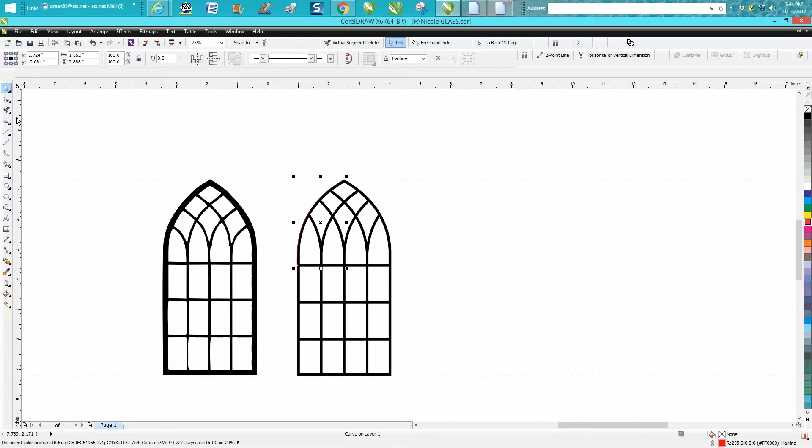I got my nudge factor set pretty high. I'm going to move my arch over, Control D to make a duplicate of it, then hold down the Control button and make an exact mirror of it.

Now I've put in some indexing lines at the top and the bottom of what we need. So now I'm going to take my 2-point line, grab that node, hit the Control button, and move straight down past my line. I think I actually missed the node on that one.

Then I'm going to take another 2-point line and go a little bit past my line. Sometimes Corel does that. So now you've got your shape.

Take your Smart Fill tool, fill it in, move that out of the way, left click, right click, and basically you have a perfectly welded group. Let's move it back over.

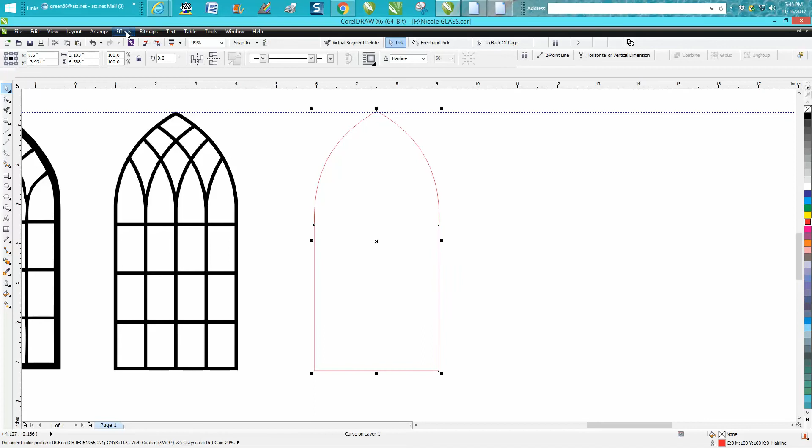Now go up to Effects, Contour. We're going to contour to the inside 0.09. There we have our shape.

Now I could break that apart, but to me it's a lot easier to take your Smart Fill tool and just get that shape. We can erase this one, move it back over, move our Smart Fill away, left click, right click. So we're pretty much got the shape.

Now we need to bring down some indexing lines. I'm going to put it at the top, or right about the middle of that line, and about the middle of - I'll tell you what, we're going to go to the bottom on both of them.

Now, since we're at 0.09, I'm going to draw a line that's 0.09. Doesn't matter how long it is.

Now we're going to move this down to where it's right there. We're going to make another one and move it down to the very bottom. For the video, like I said earlier, I'm not going to try to get everything dead on, but it needs to be pretty close.

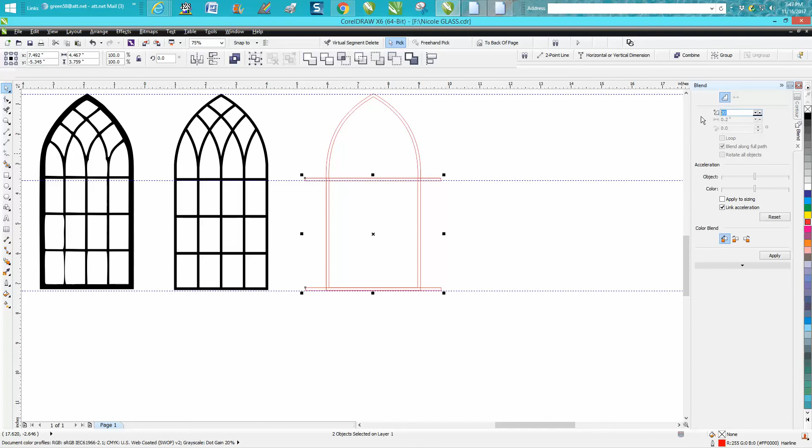You've got that one selected, select the other one, go up to Effects, Blend. We're going to blend - we need 2. So now we've got those.

Now I would go ahead and cut off - this is one thing nice about the virtual segment delete key. If you'll just get in the area... oh, see what's happening? We have to break the blend apart for it to delete those lines.

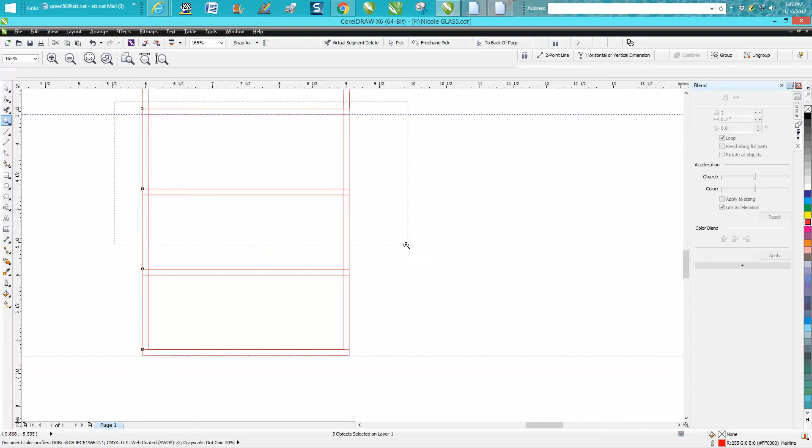Now some people are going to say, well, why don't you use the weld tool? The weld tool in this particular case I don't think will work, but we're going to go ahead and delete all these lines we do not need.

There might be a way to intersect or something, and also with the virtual segment delete key, you don't actually have to be on it. Sometimes you can do a double line right there.

We got one more set. This is going to be a long video - I might break it up into 2 just so it won't be so long.

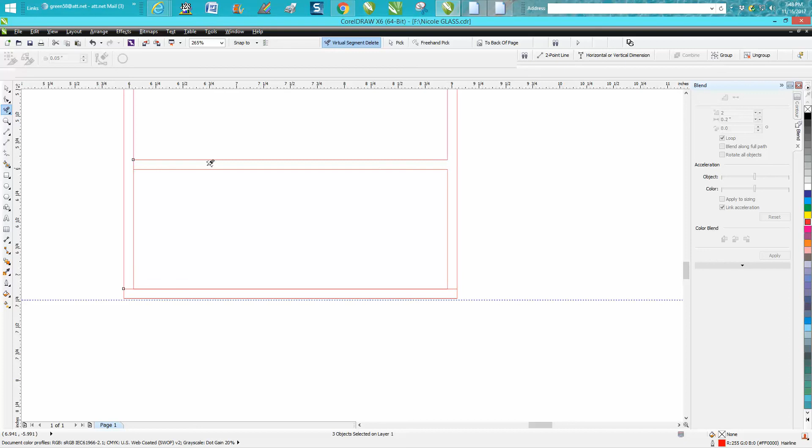Now, we have some double lines there maybe, so this is what I'm going to do: I'm going to take my Smart Fill tool and fill it in, and move it out of the way. That way, if we have any double lines like down in here, it won't really matter, because now we don't.

So let's take this and get that out of the way. Let's move this over. Now all we need to do is the same thing on this end, because you really have to start drawing these before you can draw the other ones.

So we need another 0.09 line. Doesn't matter how long it is, it doesn't have to be that long. We're going to put it on the edge this time.

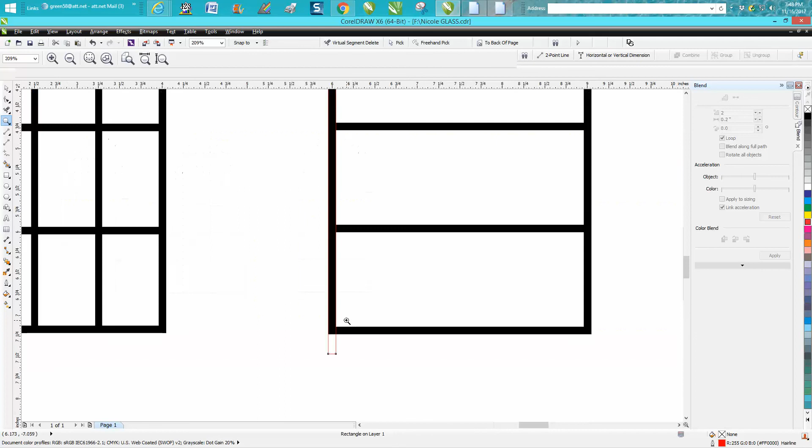It's dead on. Control D, move it over to the other one. All you have to do is have it past your object, so you'll be able to grab that handle.

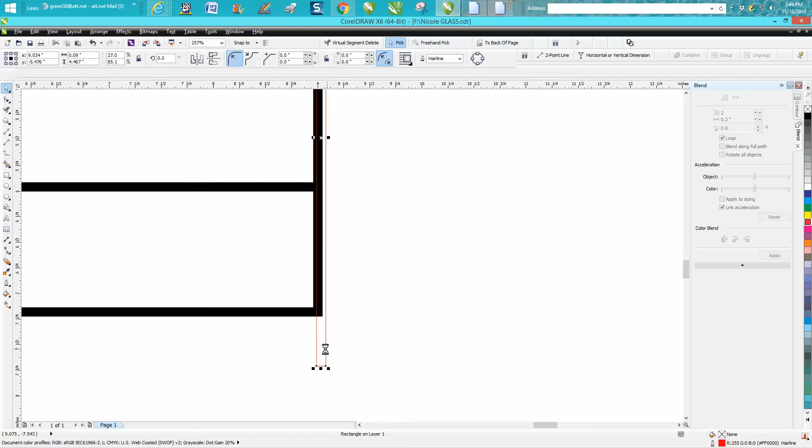Now I'm going to change my nudge factor to 0.001. I'm going to just nudge this over till it's in line with this. All right, we got that.

We're going to keep with the blend tool. I'm going to hold down the shift key and grab both these. I'm going to blend 2 again - no, actually this time we need 3. Apply.

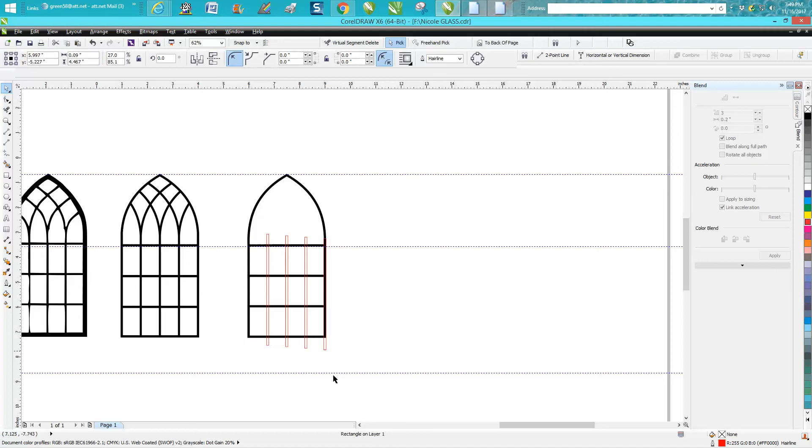Now we can break the blend apart. Get rid of this line, get rid of this line. We can actually take away our fill. And now we're going to take and get rid of these.

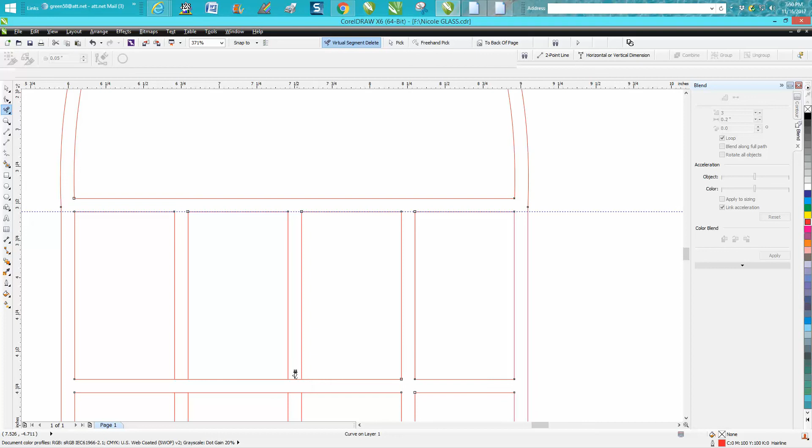Now this is one thing I like about the virtual segment delete tool. I can delete all those lines as long as you don't go outside the line - it's going to delete all those lines. You don't always have to be dead on it, so you can go right down the middle and just basically you're using it as a lasso tool.

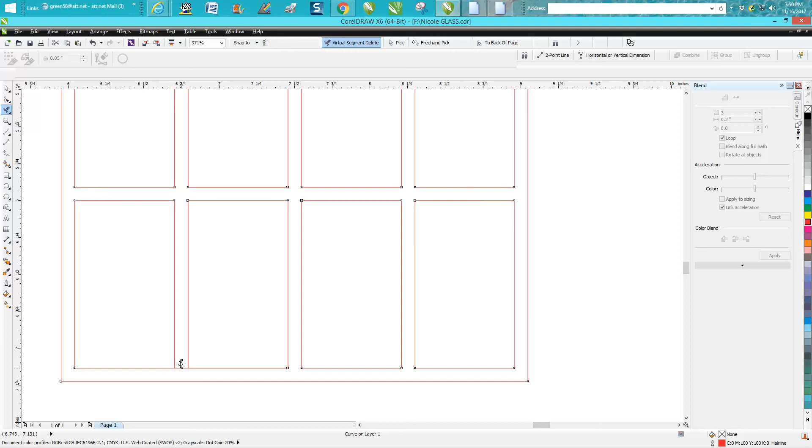Anyway, then take the Smart Fill tool and fill it in. We're halfway home. I'm going to stop this video, but if you want to watch how to make these, or how I would make them, stay tuned for the second part. Hope that helped a little bit, and thank you for watching.